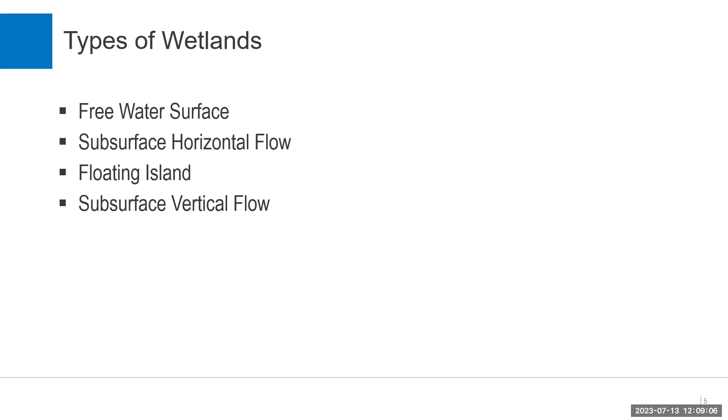There are different types of wetlands you can find out there: free water surface, subsurface horizontal, floating islands, and subsurface vertical flow. Here we'll cover on a high level what each of these types is.

Starting off with the free water surface wetland. These types of wetlands typically have the water surface exposed to the atmosphere. They enhance the habitat for wildlife and can also be used for public recreation by adding things such as trails for hiking, or parks, so that the community is involved with that application. The plants in these types of wetlands are planted based on the location as well as velocities in the flow of water. The flow will typically come in and exit at the same elevation, just a different location. One big thing to note with this type is that you can have issues with odor as well as bug problems because the water surface is so exposed.

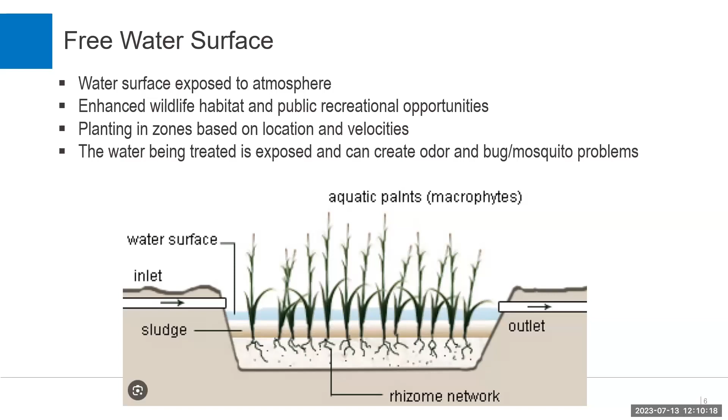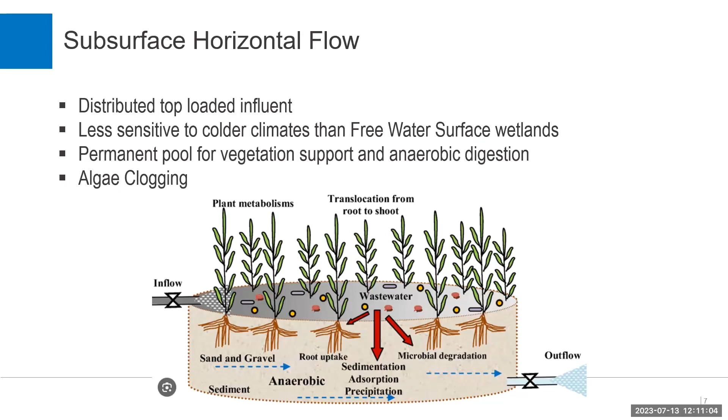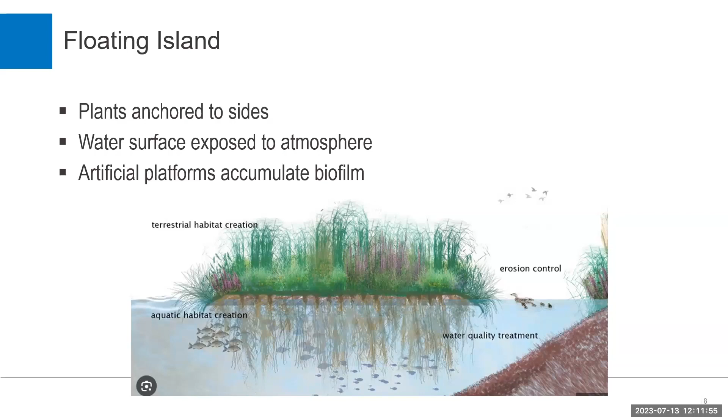The next one is the floating island. It's a floating island, as the name suggests. The plants are typically anchored to the sides, and the water surface is exposed, similar to the free water surface type. The root system of the plants grows deep, down to the bottom of the water, forming columns of roots with a slimy layer growing within them. That's the biofilm, which is good for all the nice cleaning and water quality happening in the wetland.

One good thing to note is that because the water comes in and exits low and is not as exposed to the surface, you have less to worry about smells and bugs. You end up getting a permanent pool for the plants, which is good in dry seasons. Lastly, this type of wetland might need pumping depending on your topography.

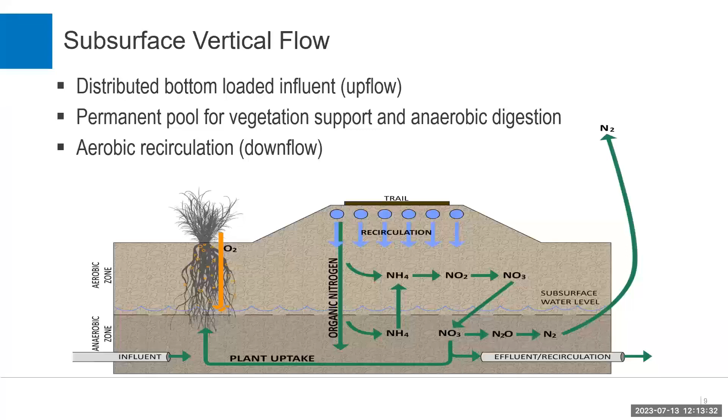Lastly, the role of plants within wetlands. As you've seen, we need plants in all four types mentioned, and they play a big role. They are important in allowing the biofilm to grow, creating safe habitat for wildlife, helping in the treatment process, and providing oxygenation.

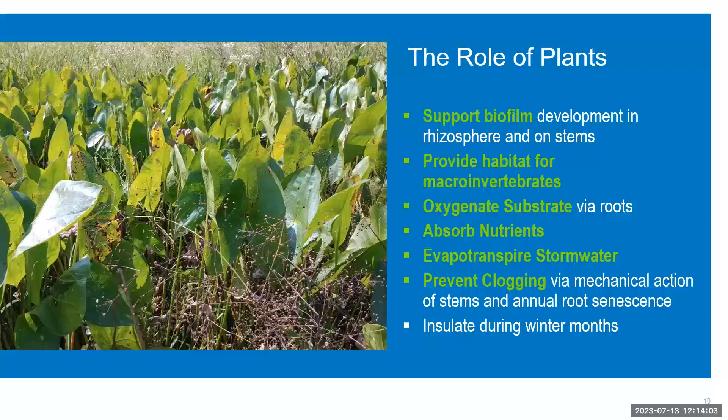Okay, so now getting into the case study, we'll talk about how we incorporated the wetlands into our case, starting off with Evansville.

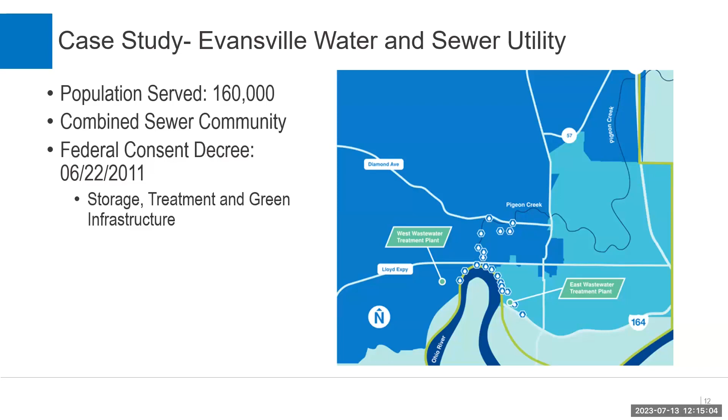The site project is located off of the Ohio River, just southwest of Indianapolis. The population is about 160,000 persons. They are still a city with a combined sewer system, and this project really began because they entered into a federal consent decree in June of 2011. Within the decree, they had several requirements related to treating and managing their CSOs, which we'll discuss later. On a high level, several CSOs discharge into the Bee Slough channel, and that eventually goes into the Ohio River.

Bee Slough is a concrete lined channel where 3 CSOs discharge into it, and eventually that discharge, after treatment, goes into the Ohio River. One problem they're having is that the CSOs can sometimes sit in the channel for too long, because you can't discharge into the Ohio River when it's at a high water level. So this goes into why we were working on this project.

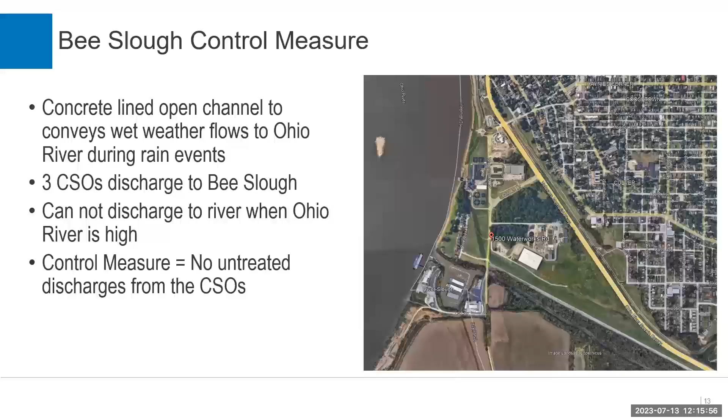Initially the project was designed to have a 300 MGD pump station, with the end goal of having no untreated discharges coming from all 3 CSOs. The plan required conveyance, pumping, wetlands, treatment, and disinfection, with an end goal of meeting NPDES permit limits and the consent decree requirements as well.

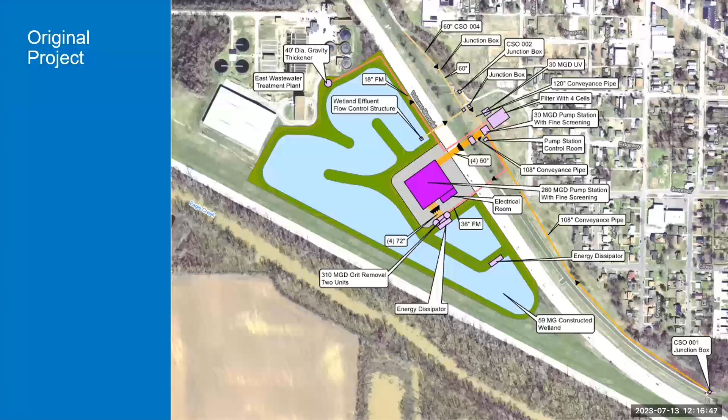So the original plan called for a 300 mgd pump station, as I mentioned previously. The client was looking to get additional analysis, and this is where Greeley and Hansen came in. We did analysis of costs and looked at different parameters to make the pump station smaller, which would mean the project would cost less. So we looked at storage and conveyance within the site area in order to minimize the size of the pump station.

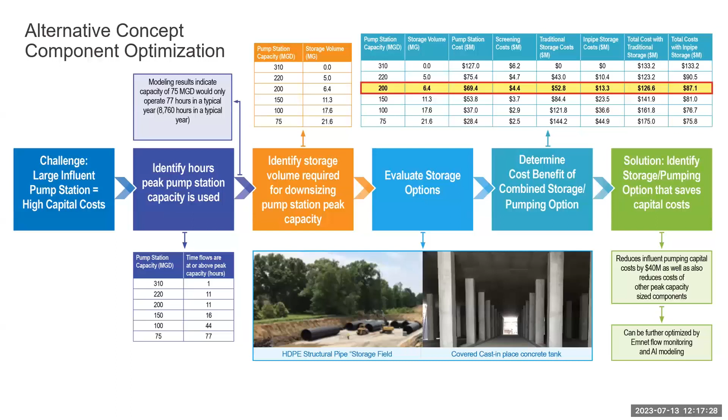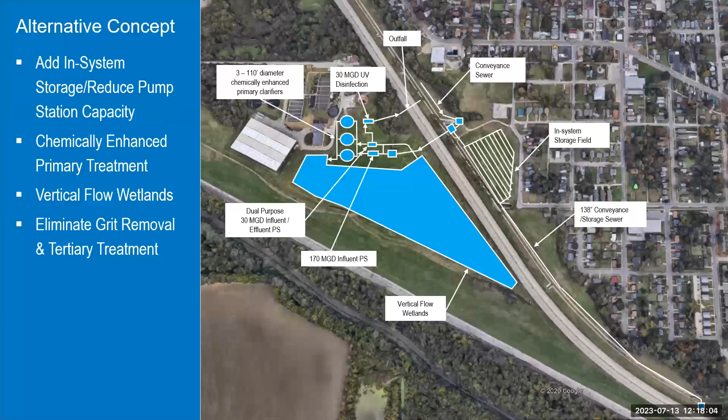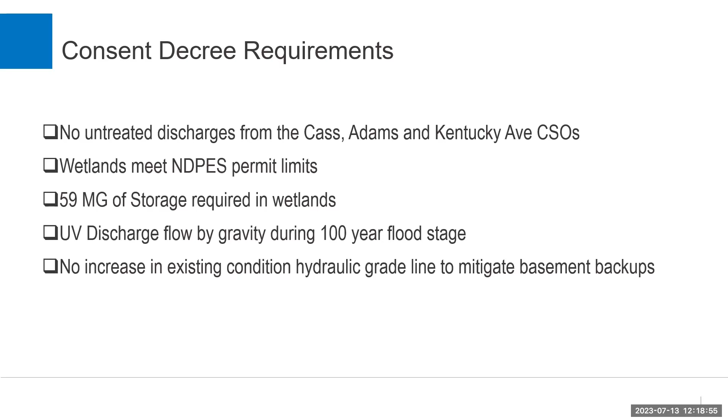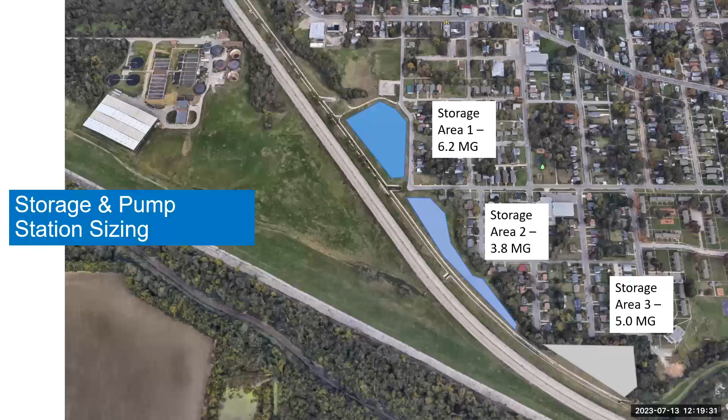We began by evaluating how much storage could be added and how much available space we had for storage in order to downsize from the 300 mgd pump station. We were able to get quite a lot of storage on the opposite side of the site area, at least 12 million gallons, which is good because this meant we could downsize the pump station.

To begin sizing the pump station, we looked at storm frequencies. We wanted to size a pump station that would be used more than just a couple times a year, one that would be used even with smaller events. So we checked frequencies of smaller storms to ensure the pump station would be used more frequently.

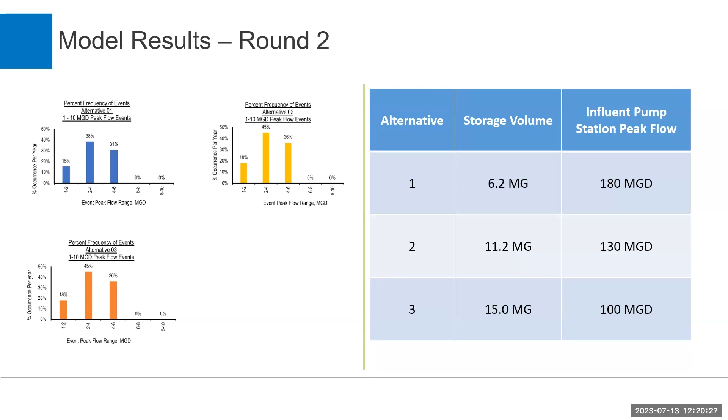You can see the alternatives on the side, with every alternative showing higher storage and a smaller pump station, and on the left-hand side the different frequencies for individual storms. We then did a cost comparison to check storage versus pump station capacity, looking at present costs, future costs for the utilities, maintenance, and similar factors. We ended up landing between 130 and 100 mgd for the pump station.

Okay, now getting into the proof of concept. So while refining the design, we had to keep in mind to discharge by gravity at the 100-year flood elevation, making sure that our wetlands had 59 million gallons of storage, and also ensuring that we weren't creating any basement backups.

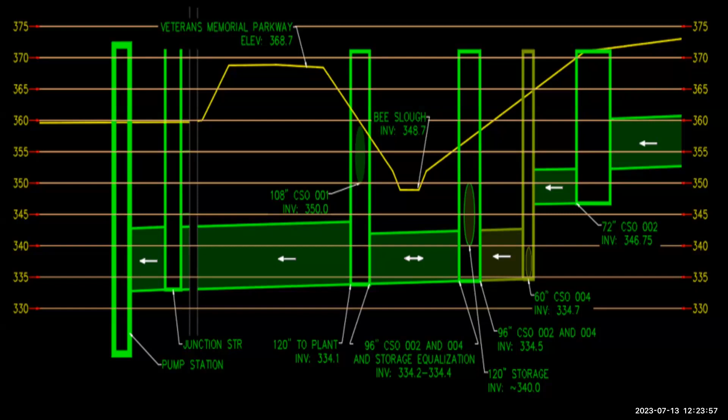And now I think this is when I pass it on to Amanda to discuss a little bit more about the different parts of the treatment plant. Thank you, Daria. So we talked a little bit about influent pumping. We were looking at our storm frequencies and basically when and how often the pump station would be used.

So something else that played into the influent pumping station is the CSOs. We know we had the 3 CSOs. The depths of the inverts of those CSOs differed, they weren't really all the same as we kind of noted in the previous slides. They had quite a bit different flow rates coming from each CSO. And we also have different construction phasing, as that was starting to be shown in the previous slides.

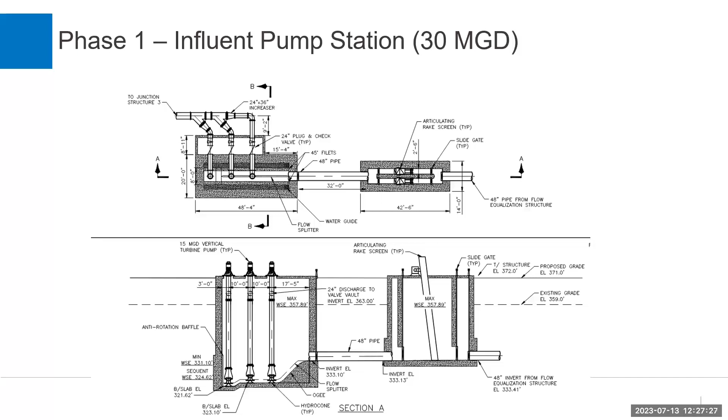And so the second pump station would be a little bit higher in elevation. There was no need to put both screen and pump stations at that lower elevation. The lower one can get some of the up to 30 MGD in storms, and then anything beyond that 30 MGD point would go to this 85 MGD influent pump station.

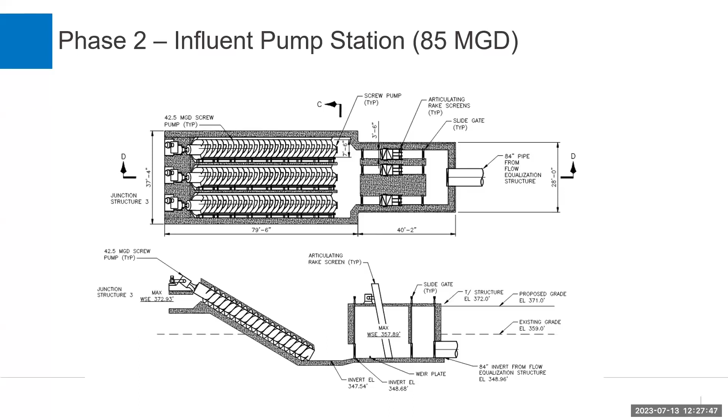The chemically enhanced primary treatment was an important part of the design, even though the wetlands will have good removal of everything expected to come into this area since it is a wet weather facility, we still need to make sure we can remove as many solids and other things as we could before it got to the wetlands.

This is interesting and a little different from a traditional wastewater treatment plant in that it doesn't have grit removal, and we're introducing chemicals at this point to get some of those larger solids out.

We are looking at 2 clarifiers, each 130 feet in diameter, both center feeds, and combined they would be 115 MGD. Something to note: when we have lower flows, either both would be operating, or the diversion structure just upstream would only send flow to one clarifier and not necessarily both.

As part of the testing and the chemicals that were chosen for the clarifiers, I went through a more extensive process than typically done in the planning phase. We looked at gathering jar tests and samples from each CSO for multiple wet weather events. Those were tested against a set of chemicals, and we went through standard operating protocol and extensive testing to figure out with the data which chemical worked best and how much would be needed. It actually happened such that our results showed our chosen chemical is currently being used at both the east and west wastewater treatment plants for phosphorus removal, so there would be benefit to using the same chemical as the adjoined east wastewater treatment plant.

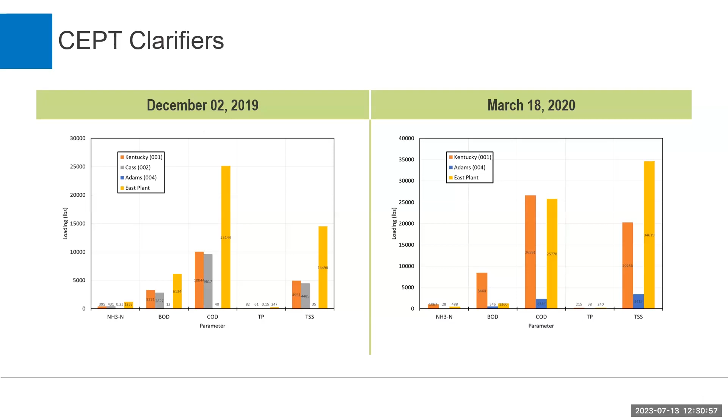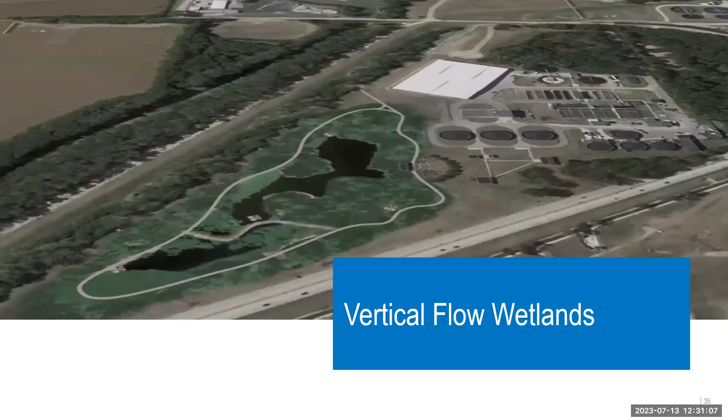Next is the vertical flow wetlands. The clarifiers would discharge directly to these wetlands. Here's a bird's eye view of what it would potentially look like.

We had planned for 59 million gallons of storage, most of which would be below grade. This was that subsurface vertical flow that Daria talked about. A lot of the gravel would be storage area for the water, but it wouldn't technically be above the surface. You can see there are quite a few sections of the wetlands, making it easier for maintenance.

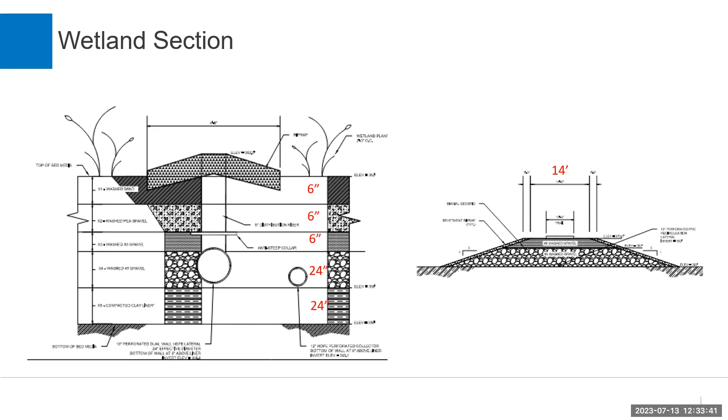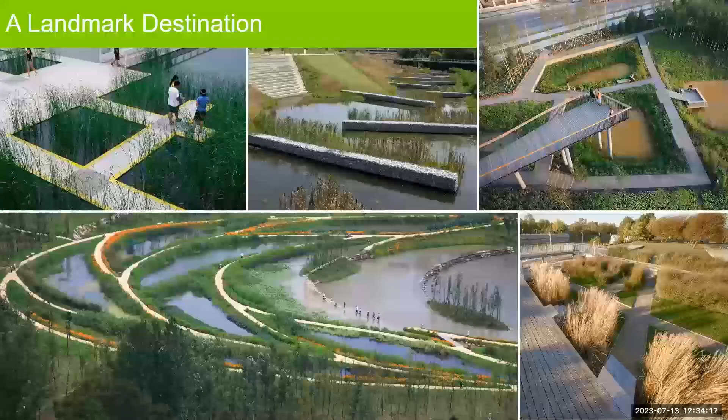In the next few slides, here are some examples of what community benefits this could bring and what this could look like - examples of wetlands and walkways, and how pedestrians or the public can interact with the wetlands.

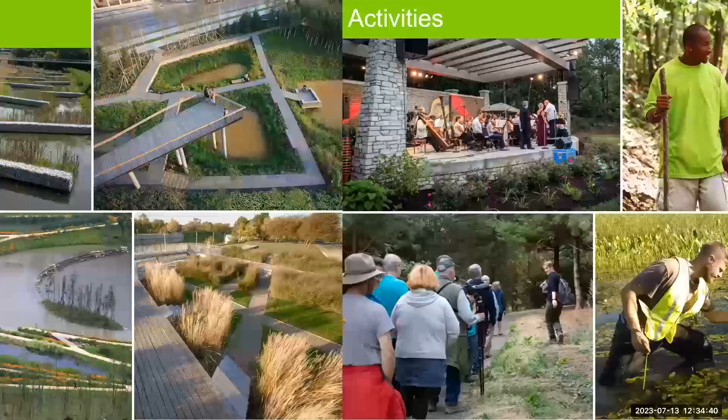The idea is that it would basically be a benefit to the community. It would make a popular site to come to for things like performances, lectures, and guided tours. There's also a new pump station located close to this site that provides recreational amenities and education, as well as opportunities for the public to access. It would be great to have 2 facilities this close together that provide educational opportunities to the public.

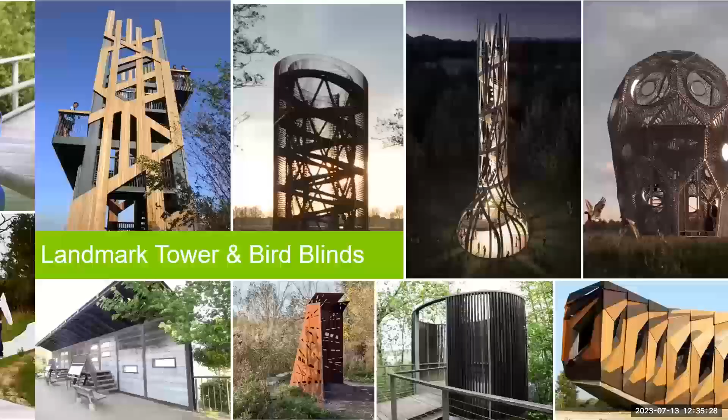Some of the examples you'll see here coming up are either a landmark tower or a bird blind. This is located off Veterans Memorial Parkway, a large thoroughfare through Evansville, and one of the main entrances to get from the interstates down to downtown Evansville. So being able to welcome people into Evansville is a good idea, as well as getting more of that environment observation here.

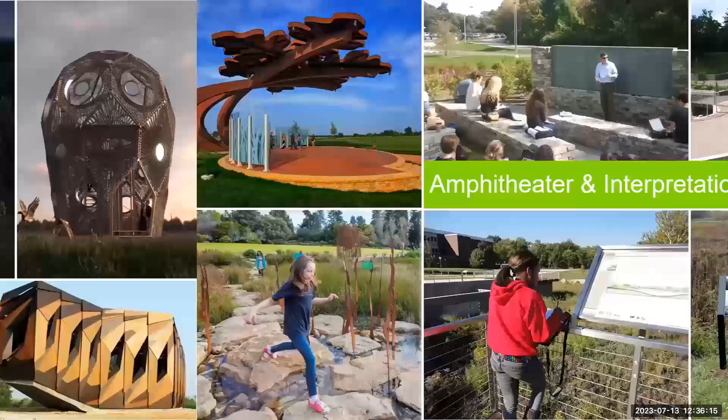Another idea that was considered, though not shown on the site plan, is an amphitheater along the area. They plan on having educational signage to interpret the site's features through these panels, combined with art elements, which can draw attention to the site.

There's also a future walk or trail planning to connect to a greenway that exists just north of the site, which would draw attention from that trail to Bee Slough.

And now I will turn it back to Daria. Thanks, Amanda. So as part of our design, we ensured that we evaluated hydraulically pretty much every step of the process between every different component of the treatment plant.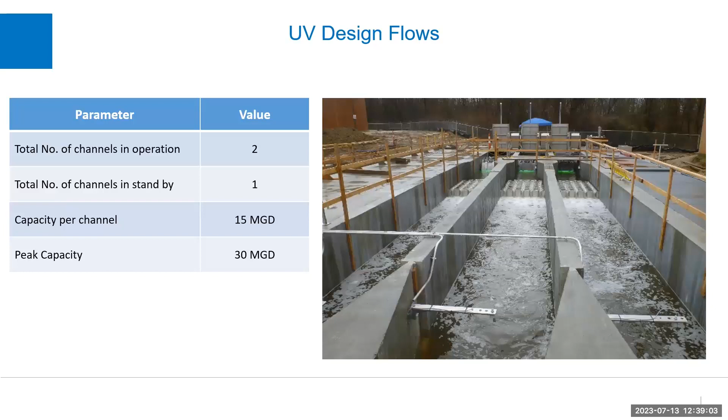The flows will be split equally, both on the influent and effluent side of the UV facility. There are slide gates for maintenance purposes and to control the flow going into each channel. We also have control gates and Parshall flumes to measure the flows going through each channel.

We would also break the site construction into different construction packages, which would allow them to be bid separately.

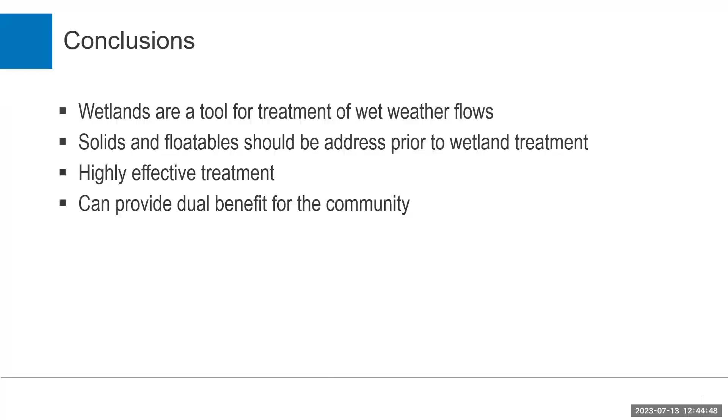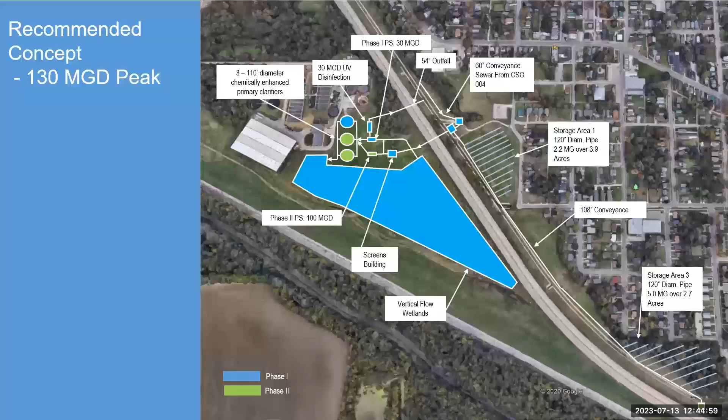Okay, how about how long will water stay in that wetland system? Is that days, weeks, hours? The idea is there would always be some amount of water remaining. All the water would not be pumped out, and since a lot of it is below the top of the gravel, it wouldn't evaporate as quickly. So between the amount of water we would keep within the wetlands and the recirculation pump and system, the idea is there would always be some amount of water within the wetlands.

Okay, and is there an overall cost for this type of project? For the entire project? Yeah, is this being funded by the utility? It would be, although they would be seeking assistance likely through SRF or getting some kind of interest reduction, but it was just, I believe, about a hair under 200 million.

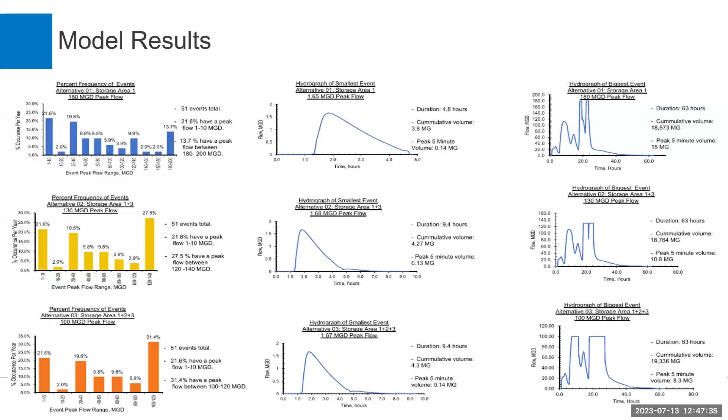And in the presentation, did you say it would take maybe 8 to 10 years to construct a facility like this? Correct.

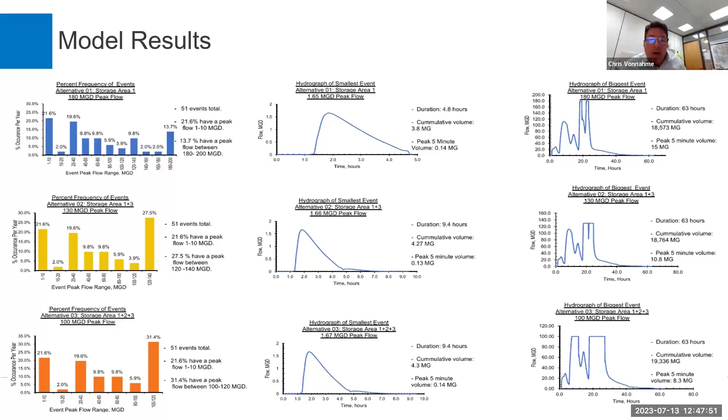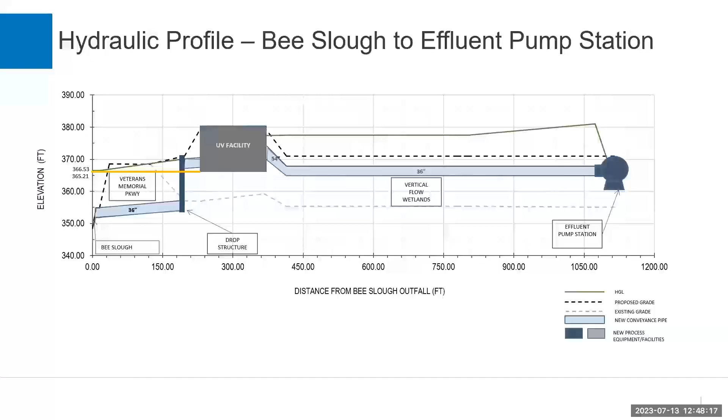And some of those pictures you showed, of some other facilities or what the thing may look like, are those actual facilities that have already been constructed, or do they just look like actual facilities? These are just examples. This has not been constructed, at least here at Bee Slough. But in terms of our site plan, some of that was essentially 3D drawn. It's not been constructed.

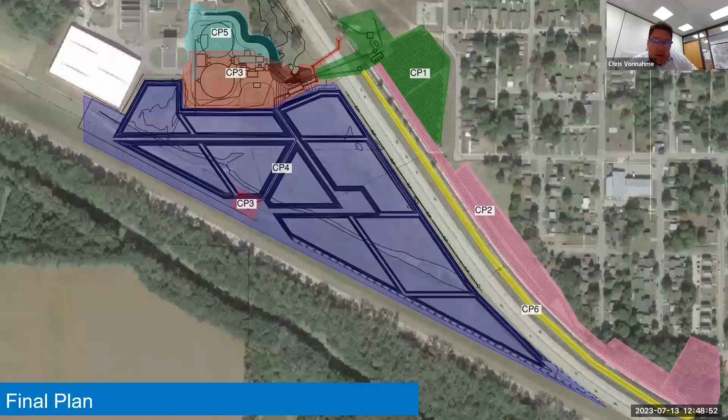Very interesting. Let me check the chat box one more time. I'm not seeing any other questions at this time, but like you said, we do have contact information for you guys, so if others have questions that come up at a later time, those could be sent to you and you could answer them for us. Sure, but I think that's all I see. No other questions in the chat box.